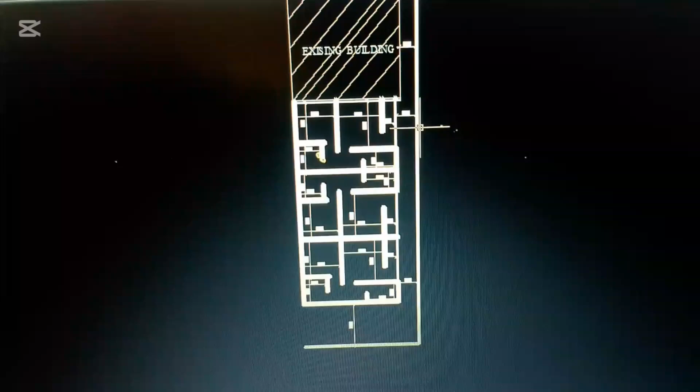So today we are going to be discussing how to add an extension to an existing building.

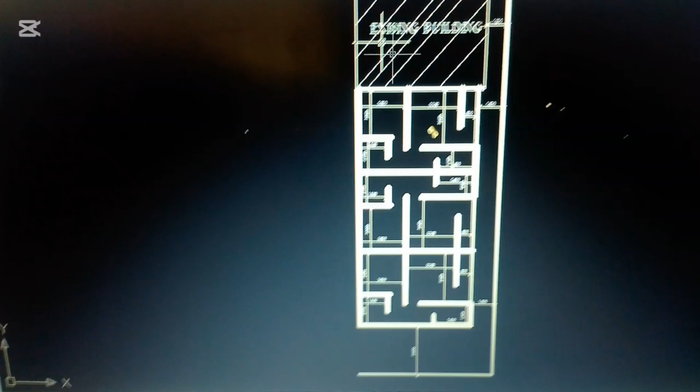So for this very project, this part is already existing, it has already been built. Because the size of the building is small, the owner decided to extend and increase the length of the building so as to have more functionality on the plot of land, since there is enough space at the back. So for this project, the space available at the back was enough to create the type of design that we wanted, which was up to 60 to 70 feet to the fence.

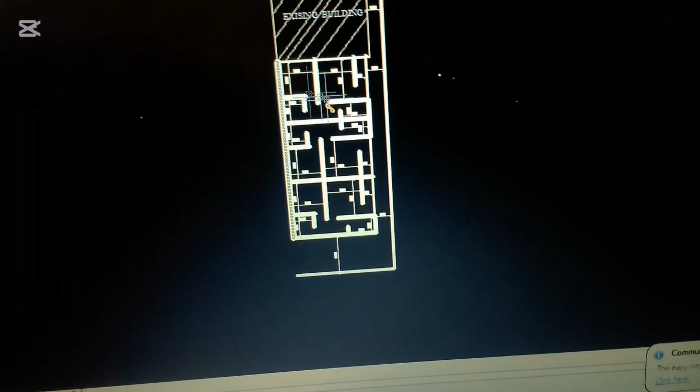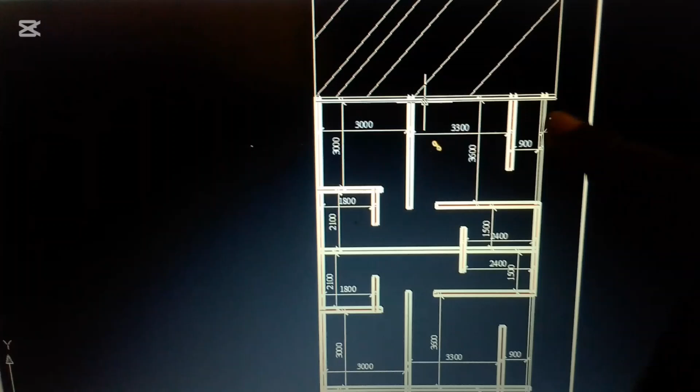So what we did was start taking our measurements for the horizontal measurement. Like if you are measuring from this place to this place, that's the horizontal measurement. What we did was measure from the horizontal line of the existing building, since this block is already existing. So we had to take measurement from here, 10 feet for this room, then for the living room, 11 feet, and so on, to get all the horizontal measurements.

Then for us to get the vertical measurement, which are the straight lines, we had to make use of line, that's rope used by bricklayers. You take a line from the existing building, a few distance away from the end of the building so that you can have a straight line. You get a rope from here and extend it out away from the distance of the new project, so you can get your measurements from that rope.

So it's the rope that directs us to know the alignment, so that the new building will align with the existing building and be on the same line. That's why we make use of the line of rope for bricklayers, extending it a few distances away from the existing building to get a straight aligned line, from the existing building to the new building, so it will be a straight aligned line.

So we have to check it properly, that's practical work, not theoretical, so that it will be straight. That will be covered in another video. It will be straight, aligned with the building.

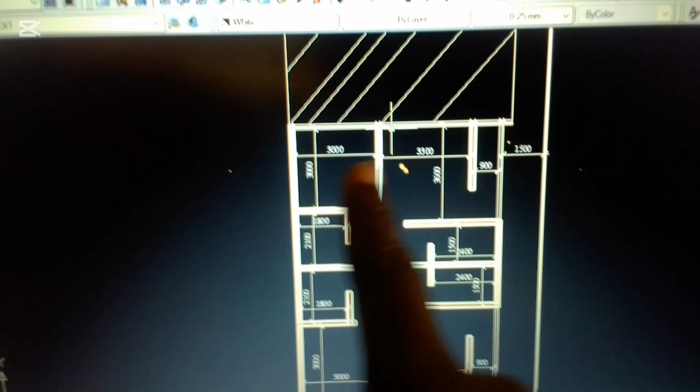So after doing that, you can now start taking your measurements from the rope, the rope that is already aligned. You take your measurement from there, and whatever measurement you are taking, you add the size of the block for that rope measurement. After taking the first measurement, you stop adding the size of the block. So whether you are measuring in to in, or out to out, you take your measurements accordingly.

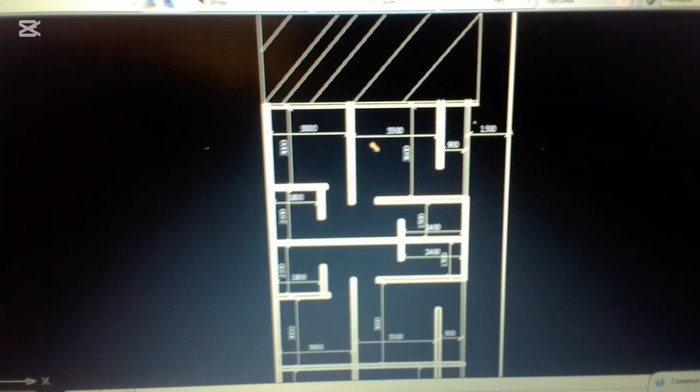But for the very first one, since you have not placed your block yet, once you align it, you position your block at that point. Then at the extreme end, you position where the new building will stop. You take your calculation, position your block, align it straight, then from the inside face of the block, you can take your measurement, either out to out or in to in. When done, you can get all your measurements, horizontal and vertical, this way.

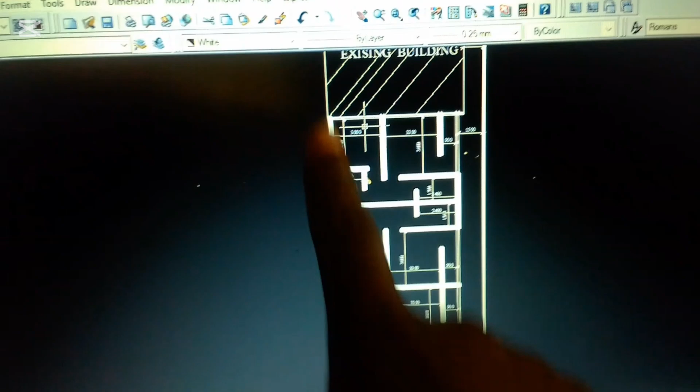You take all your measurements from this straight line that you've gotten, already aligned with your existing building. That's where you take all your vertical measurements, and from there you can get an accurate result.

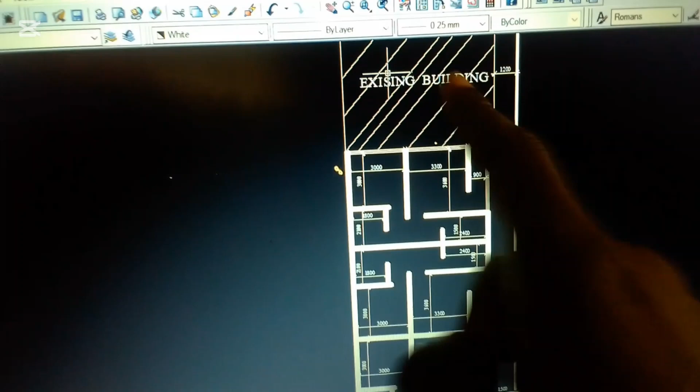So it all depends on the shape of the existing building. For this one, it's already a rectangular shape and straight. But there are buildings that are not straight, where some parts go inside while some parts go outside. The main thing is for you to align with the external edge of the building, and if it's not straight, you know where to align from based on the calculation and the type of design you are working on.

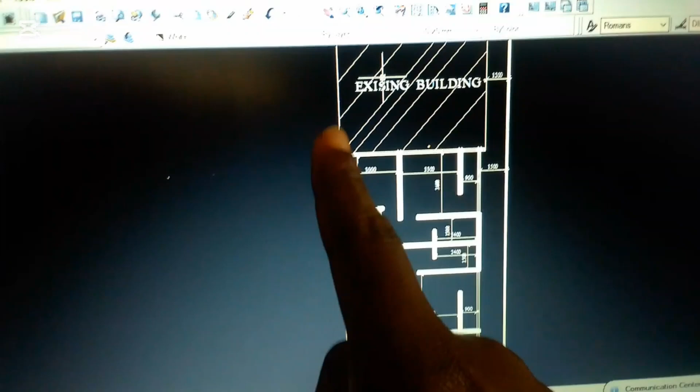So the main point is for you to align the existing building with the proposed building, so that the existing building will be aligned with the new building. So it's very important. That's how you extend an existing building.